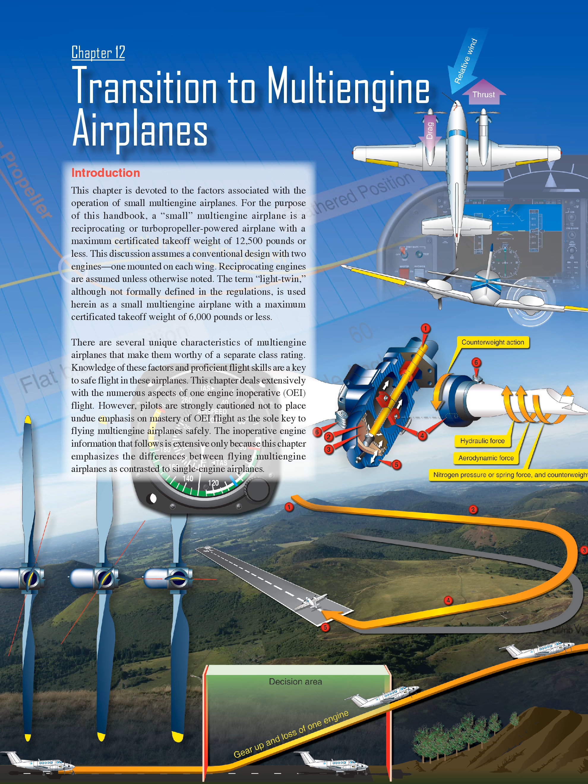This chapter deals extensively with the numerous aspects of one-engine inoperative, OEI, flight. However, pilots are strongly cautioned not to place undue emphasis on mastery of OEI flight as the sole key to flying multi-engine airplanes safely. The inoperative engine information that follows is extensive only because this chapter emphasizes the differences between flying multi-engine airplanes as contrasted to single-engine airplanes. The modern, well-equipped multi-engine airplane can be remarkably capable under many circumstances. But, as with single-engine airplanes, it must be flown prudently by a current and competent pilot to achieve the highest possible level of safety.

This chapter contains information and guidance on the performance of certain maneuvers and procedures in small multi-engine airplanes for the purposes of flight training and pilot certification testing. The airplane manufacturer is the final authority on the operation of a particular make and model airplane. Flight instructors and students should use the Federal Aviation Administration's Approved Flight Manual, AFM, and/or the Pilot's Operating Handbook, POH, but realize that the airplane manufacturer's guidance and procedures take precedence.

The basic difference between operating a multi-engine airplane and a single-engine airplane is the potential problem involving an engine failure. The penalties for loss of an engine are twofold: performance and control. The most obvious problem is the loss of 50% of power, which reduces climb performance 80 to 90%, sometimes even more. The other is the control problem caused by the remaining thrust, which is now asymmetrical. Attention to both these factors is crucial to safe OEI flight. The performance and systems redundancy of a multi-engine airplane is a safety advantage only to a trained and proficient pilot.

Terms and definitions: pilots of single-engine airplanes are already familiar with many performance V-speeds and their definitions. Twin-engine airplanes have several additional V-speeds unique to OEI operation. These speeds are differentiated by the notation SE for single-engine. A review of some key V-speeds and several new V-speeds unique to twin-engine airplanes are listed below. VR, rotation speed, speed at which back pressure is applied to rotate the airplane to a takeoff attitude. VLOF, liftoff speed, speed at which the airplane leaves the surface. Note, some manufacturers reference takeoff performance data to VR, others to VLOF.

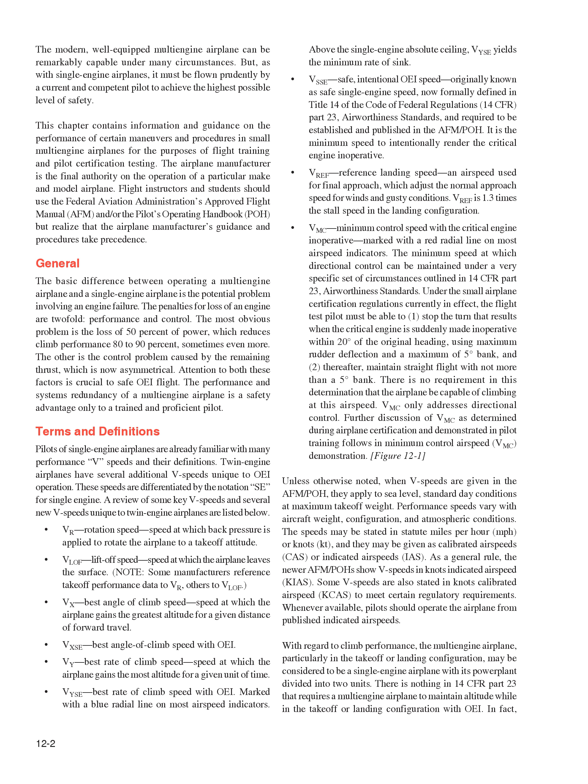With regard to climb performance, the multi-engine airplane, particularly in the takeoff or landing configuration, may be considered to be a single-engine airplane with its power plant divided into two units. There is nothing in 14 CFR Part 23 that requires a multi-engine airplane to maintain altitude while in the takeoff or landing configuration with one engine inoperative, OEI. In fact, many twins are not required to do this in any configuration, even at sea level.

The current 14 CFR Part 23 single-engine climb performance requirements for reciprocating engine-powered multi-engine airplanes are as follows. For more than 6,000 pounds maximum weight and/or VSO more than 61 knots, the single-engine rate of climb in feet per minute, FPM, at 5,000 feet mean sea level, MSL, must be equal to at least 0.027 VSO². For airplanes type certificated February 4, 1991, or thereafter, the climb requirement is expressed in terms of a climb gradient, 1.5%. The climb gradient is not a direct equivalent of the 0.027 VSO² formula. Do not confuse the date of type certification with the airplane's model year. The type certification basis of many multi-engine airplanes dates back to the Civil Aviation Regulations, CAR 3.

For 6,000 pounds or less maximum weight and VSO 61 knots or less, the single-engine rate of climb at 5,000 feet MSL must simply be determined. The rate of climb could be a negative number. There is no requirement for a single-engine positive rate of climb at 5,000 feet or any other altitude. For light twins type certificated February 4, 1991, or thereafter, the single-engine climb gradient, positive or negative, is simply determined. Rate of climb is the altitude gain per unit of time, while climb gradient is the actual measure of altitude gained per 100 feet of horizontal travel, expressed as a percentage. An altitude gain of 1.5 feet per 100 feet of travel, or 15 feet per 1,000, or 150 feet per 10,000, is a climb gradient of 1.5%.

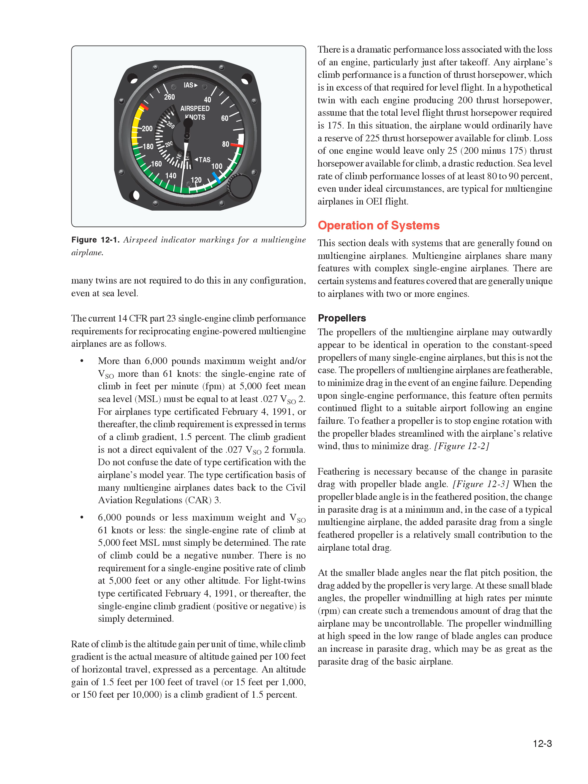As a review, the constant speed propellers on almost all single-engine airplanes are of the non-feathering, oil pressure to increase pitch design. In this design, increased oil pressure from the propeller governor drives the blade angle towards high pitch, low RPM. In contrast, the constant speed propellers installed on most multi-engine airplanes are full feathering, counterweighted, oil pressure to decrease pitch designs. In this design, increased oil pressure from the propeller governor drives the blade angle towards low pitch, high RPM, away from the feather blade angle.

In effect, the only thing that keeps these propellers from feathering is a constant supply of high-pressure engine oil. This is a necessity to enable propeller feathering in the event of a loss of oil pressure or a propeller governor failure. The aerodynamic forces alone acting upon a windmilling propeller tend to drive the blades to low pitch, high RPM. Counterweights attached to the shank of each blade tend to drive the blades to high pitch, low RPM.

Inertia, or apparent force, called centrifugal force, acting through the counterweights, is generally slightly greater than the aerodynamic forces. Oil pressure from the propeller governor is used to counteract the counterweights and drives the blade angles to low pitch, high RPM. A reduction in oil pressure causes the RPM to be reduced from the influence of the counterweights. Figure 12.4. To feather the propeller control is brought fully aft.

All oil pressure is dumped from the governor, and the counterweights drive the propeller blades towards feather. As centrifugal force acting on the counterweights decays from decreasing RPM, additional forces are needed to completely feather the blades. This additional force comes from either a spring or high-pressure air stored in the propeller dome, which forces the blades into the feathered position. The entire process may take up to 10 seconds. Feathering a propeller only alters blade angle and stops engine rotation.

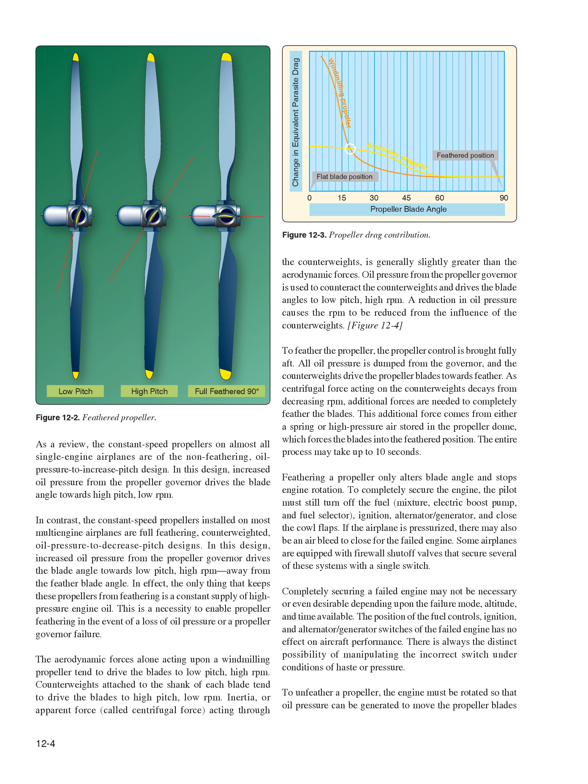To unfeather a propeller, the engine must be rotated so that oil pressure can be generated to move the propeller blades. From the feathered position, the ignition is turned on prior to engine rotation with the throttle at low idle and the mixture rich. With the propeller control in a high RPM position, the starter is engaged. The engine begins to windmill, start, and run as oil pressure moves the blades out of feather.

As the engine starts, the propeller RPM should be immediately reduced until the engine has had several minutes to warm up. The pilot should monitor cylinder head and oil temperatures. In any event, the AFM/POH procedures should be followed for the exact unfeathering procedure. Both feathering and starting a feathered reciprocating engine on the ground are strongly discouraged by manufacturers due to the excessive stress and vibrations generated.

As just described, a loss of oil pressure from the propeller governor allows the counterweights, spring, and/or dome charge to drive the blades to feather. Logically then, the propeller blades should feather every time an engine is shut down as oil pressure falls to zero. Yet, this does not occur.

Preventing this is a small pin in the pitch-changing mechanism of the propeller hub that does not allow the propeller blades to feather once RPM drops below approximately 800. The pin senses a lack of centrifugal force from propeller rotation and falls into place, preventing the blades from feathering. Therefore, if a propeller is to be feathered, it must be done before engine RPM decays below approximately 800.

On one popular model of turboprop engine, the propeller blades do, in fact, feather with each shutdown. This propeller is not equipped with such centrifugally operated pins due to a unique engine design. An unfeathering accumulator is a device that permits starting a feathered engine in flight without the use of the electric starter. An accumulator is any device that stores a reserve of high pressure.

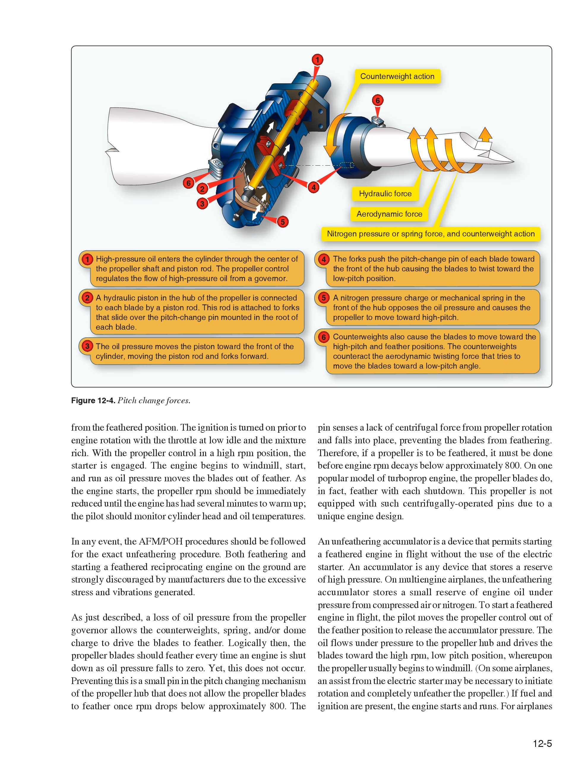On some airplanes, an assist from the electric starter may be necessary to initiate rotation and completely unfeather the propeller. If fuel and ignition are present, the engine starts and runs. For airplanes used in training, this saves much electric starter and battery wear. High oil pressure from the propeller governor recharges the accumulator just moments after engine rotation begins.

Propeller synchronization. Many multi-engine airplanes have a propeller synchronizer, prop sync, installed to eliminate the annoying drumming or beat of propellers whose RPM are close, but not precisely the same. To use prop sync, the propeller RPM is coarsely matched by the pilot and the system is engaged. The prop sync adjusts the RPM of the slave engine to precisely match the RPM of the master engine and then maintains that relationship. The prop sync should be disengaged when the pilot selects a new propeller RPM and then re-engaged after the new RPM is set.

The prop sync should always be off for takeoff, landing, and single engine operation. The AFM/POH should be consulted for system description and limitations. A variation on the propeller synchronizer is the propeller synchrophaser. A synchrophaser acts much like a synchronizer to precisely match RPM, but it goes one step further. It not only matches RPM but actually compares and adjusts the positions of the individual blades of the propellers in their arcs. There can be significant propeller noise and vibration reductions with a propeller synchrophaser.

From the pilot's perspective, operation of a propeller synchronizer and a propeller synchrophaser are very similar. A synchrophaser is also commonly referred to as prop sync, although that is not entirely correct nomenclature from a technical standpoint. As a pilot aid to manually synchronizing the propellers, some twins have a small gauge mounted in or by the tachometers with a propeller symbol on a disc that spins. The pilot manually fine-tunes the engine RPM so as to stop disc rotation, thereby synchronizing the propellers. This is a useful backup to synchronizing engine RPM using the audible propeller beat. This gauge is also found installed with most propeller synchronizer and synchrophaser systems. Some synchrophaser systems use a knob for the pilot to control the phase angle.

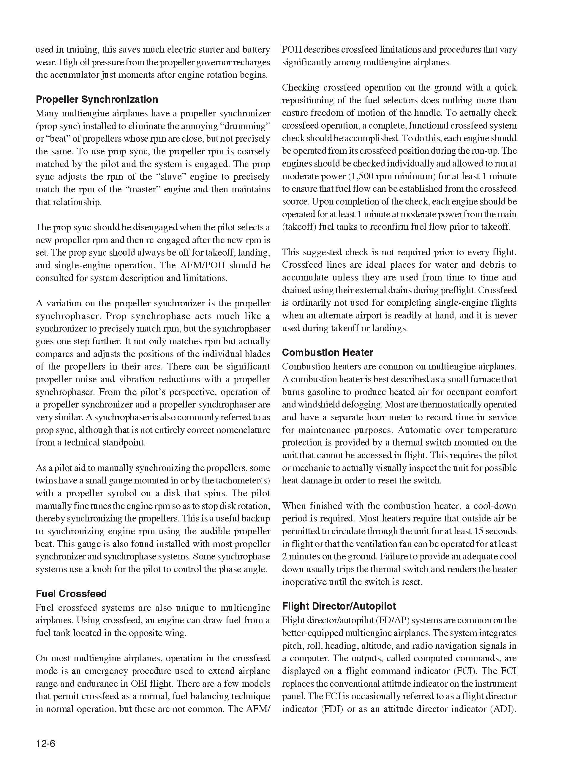Flight Director/Autopilot. FD/AP systems are common on the better equipped multi-engine airplanes. The system integrates pitch, roll, heading, altitude, and radio navigation signals in a computer. The outputs, called computed commands, are displayed on a Flight Command Indicator (FCI). The FCI replaces the conventional attitude indicator on the instrument panel. The FCI is occasionally referred to as a Flight Director Indicator (FDI) or as an Attitude Director Indicator (ADI).

The entire Flight Director/Autopilot system is sometimes called an Integrated Flight Control System (IFCS) by some manufacturers. Others may use the term Automatic Flight Control System (AFCS). The FD/AP system may be employed at the following different levels: off, raw data, flight director, computed commands, autopilot.

With the system off, the FCI operates as an ordinary attitude indicator. On most FCIs, the command bars are biased out of view when the FD is off. The pilot maneuvers the airplane as though the system were not installed. To maneuver the airplane using the FD, the pilot enters the desired modes of operation: heading, altitude, navigation, NAV intercept, and tracking, on the FD/AP mode controller.

The computed flight commands are then displayed to the pilot through either a single-cue or dual-cue system in the FCI. On a single-cue system, the commands are indicated by V bars. On a dual-cue system, the commands are displayed on two separate command bars, one for pitch and one for roll. To maneuver the airplane using computed commands, the pilot flies the symbolic airplane of the FCI to match the steering cues presented. On most systems, to engage the autopilot, the FD must first be operating.

At any time thereafter, the pilot may engage the autopilot through the mode controller. The autopilot then maneuvers the airplane to satisfy the computed commands of the FD. Like any computer, the FD/AP system only does what it is told. The pilot must ensure that it has been programmed properly for the particular phase of flight desired. The armed and/or engaged modes are usually displayed on the mode controller or separate annunciator lights.

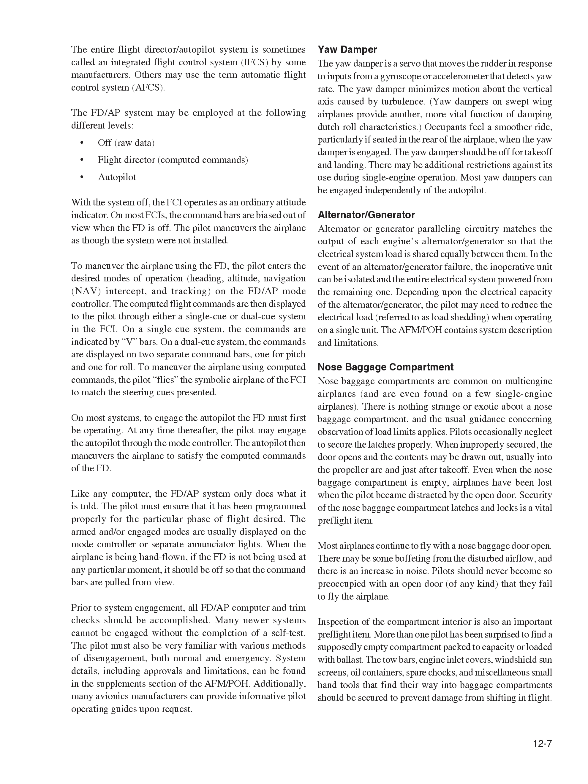Anti-icing/deicing equipment is frequently installed on multi-engine airplanes and consists of a combination of different systems. These may be classified as either anti-icing or deicing, depending upon function. The presence of anti-icing and deicing equipment, even though it may appear elaborate and complete, does not necessarily mean that the airplane is approved for flight in icing conditions. The AFM/POH, placards, and even the manufacturer should be consulted for specific determination of approvals and limitations.

Anti-icing equipment is provided to prevent ice from forming on certain protected surfaces. Anti-icing equipment includes heated pitot tubes, heated or non-icing static ports and fuel vents, propeller blades with electrothermal boots or alcohol slingers, windshields with alcohol spray or electrical resistance heating, windshield defoggers, and heated stall warning lift detectors. On many turboprop engines, the lip surrounding the air intake is heated either electrically or with bleed air. In the absence of AFM/POH guidance to the contrary, anti-icing equipment should be actuated prior to flight into known or suspected icing conditions.

Deicing equipment is generally limited to pneumatic boots on wing and tail leading edges. Deicing equipment is installed to remove ice that is already formed on protected surfaces. Upon pilot actuation, the boots inflate with air from the pneumatic pumps to break off accumulated ice. After a few seconds of inflation, they are deflated back to their normal position with the assistance of a vacuum. The pilot monitors the buildup of ice and cycles the boots as directed in the AFM/POH. An ice light on the left engine nacelle allows the pilot to monitor wing ice accumulation at night.

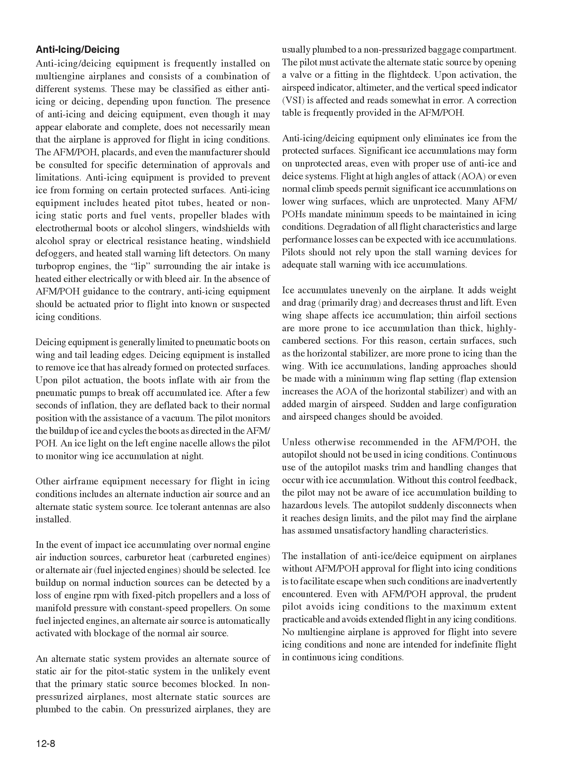Even with AFM/POH approval, the prudent pilot avoids icing conditions to the maximum extent practicable and avoids extended flight in any icing conditions. No multi-engine airplane is approved for flight into severe icing conditions, and none are intended for indefinite flight in continuous icing conditions.

Performance and limitations. Discussion of performance and limitations requires the definition of the following terms. Accelerate-stop distance is the runway length required to accelerate to a specified speed, either VR or VLOF, as specified by the manufacturer, experience an engine failure, and bring the airplane to a complete stop. Accelerate-go distance is the horizontal distance required to continue the takeoff and climb to 50 feet, assuming an engine failure at VR or VLOF, as specified by the manufacturer.

Climb gradient is a slope most frequently expressed in terms of altitude gain per 100 feet of horizontal distance, whereupon it is stated as a percentage. A 1.5% climb gradient is an altitude gain of 1.5 feet per 100 feet of horizontal travel. Climb gradient may also be expressed as a function of altitude gain per nautical mile (NM), or as a ratio of the horizontal distance to the vertical distance, 50:1, for example. Unlike rate of climb, climb gradient is affected by wind. Climb gradient is improved with a headwind component and reduced with a tailwind component.

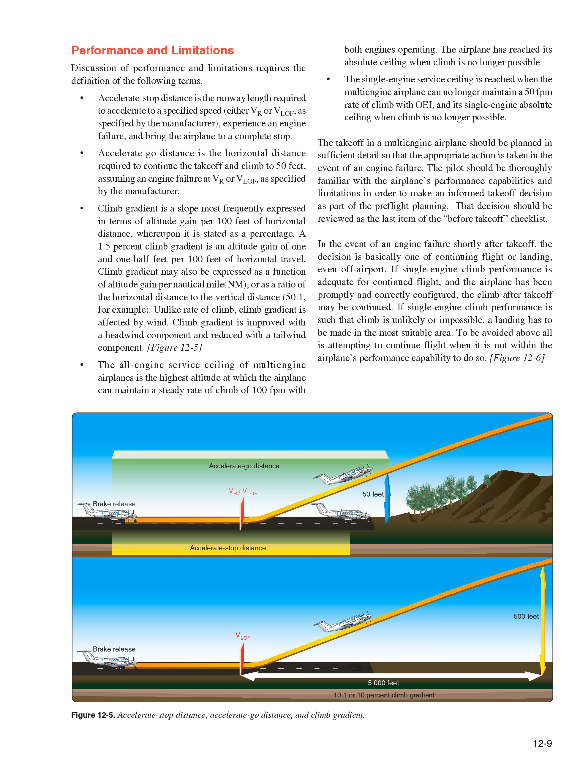Figure 12.6. Takeoff planning factors include weight and balance, airplane performance, both single and multi-engine, runway length, slope and contamination, terrain and obstacles in the area, weather conditions, and pilot proficiency. Most multi-engine airplanes have AFM/POH performance charts, and the pilot should be highly proficient in their use. Prior to takeoff, the multi-engine pilot should ensure that the weight and balance limitations have been observed, the runway length is adequate, and the normal flight path clears obstacles and terrain. A clear and definite course of action to follow in the event of engine failure is essential.

The regulations do not specifically require that the runway length be equal to or greater than the accelerate-stop distance. Most AFM/POHs publish accelerate-stop distances only as an advisory. It becomes a limitation only when published in the limitations section of the AFM/POH. Experienced multi-engine pilots, however, recognize the safety margin of runway lengths in excess of the bare minimum required for normal takeoff. They insist on runway lengths of at least accelerate-stop distance as a matter of safety and good operating practice.

The multi-engine pilot must keep in mind that the accelerate-go distance, as long as it is, has only brought the airplane, under ideal circumstances, to a point a mere 50 feet above the takeoff elevation. To achieve even this meager climb, the pilot had to instantaneously recognize and react to an unanticipated engine failure, retract the landing gear, identify and feather the correct engine, all the while maintaining precise airspeed control and bank angle as the airspeed is nursed.

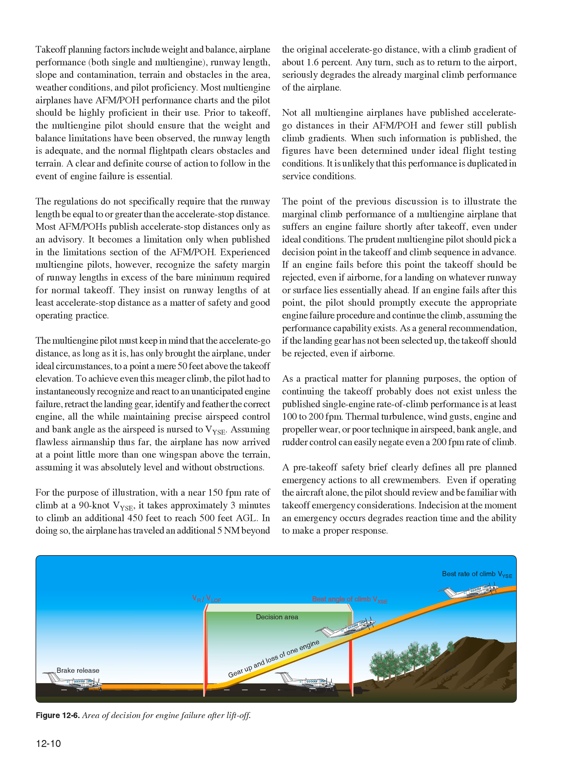Weight and balance. The weight and balance concept is no different than that of a single-engine airplane. The actual execution, however, is almost invariably more complex due to a number of new loading areas, including nose and aft baggage compartments, nacelle lockers, main fuel tanks, auxiliary fuel tanks, nacelle fuel tanks, and numerous seating options in a variety of interior configurations. The flexibility in loading offered by the multi-engine airplane places a responsibility on the pilot to address weight and balance prior to each flight.

The terms empty weight, licensed empty weight, standard empty weight, and basic empty weight as they appear on the manufacturer's original weight and balance documents are sometimes confused by pilots. In 1975, the General Aviation Manufacturers Association (GAMA) adopted a standardized format for AFM/POHs. It was implemented by most manufacturers in model year 1976. Airplanes whose manufacturers conform to the GAMA standards utilize the following terminology for weight and balance: standard empty weight plus optional equipment equals basic empty weight.

Standard empty weight is the weight of the standard airplane, full hydraulic fluid, unusable fuel, and full oil. Optional equipment includes the weight of all equipment installed beyond standard. Basic empty weight is the standard empty weight plus optional equipment. Note that basic empty weight includes no usable fuel, but full oil.

Airplanes manufactured prior to the GAMA format generally utilize the following terminology for weight and balance, although the exact terms may vary somewhat. Empty weight plus unusable fuel equals standard empty weight. Standard empty weight plus optional equipment equals licensed empty weight. Empty weight is the weight of the standard airplane, full hydraulic fluid, and undrainable oil. Unusable fuel is the fuel remaining in the airplane not available to the engines. Standard empty weight is the empty weight plus unusable fuel.

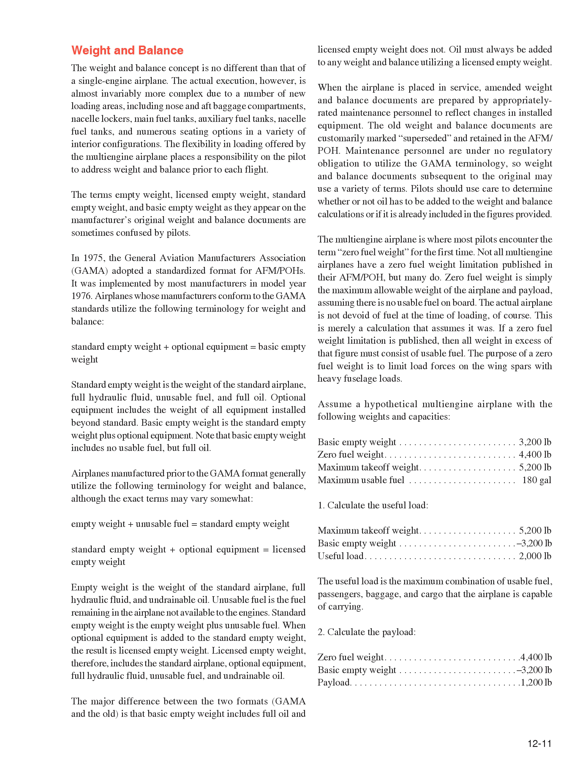1. Calculate the useful load. The useful load is the maximum combination of usable fuel, passengers, baggage, and cargo that the airplane is capable of carrying. 2. Calculate the payload. The payload is the maximum combination of passengers, baggage, and cargo that the airplane is capable of carrying. A zero fuel weight, if published, is the limiting weight. 3. Calculate the fuel capacity at maximum payload, 1,200 pounds, maximum takeoff weight.

5,200 pounds zero fuel weight.

Minus 4,400 pounds fuel allowed.

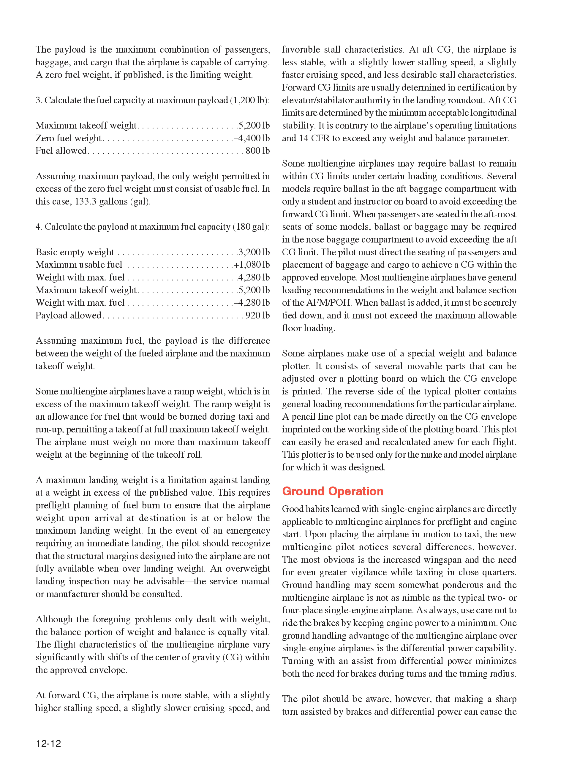The pilot should be aware, however, that making a sharp turn assisted by brakes and differential power can cause the airplane to pivot about a stationary inboard wheel and landing gear. This is abuse for which the airplane was not designed and should be guarded against. Unless otherwise directed by the AFM/POH, all ground operations should be conducted with the cowl flaps fully open. The use of strobe lights is normally deferred until taxiing onto the active runway.

Normal and crosswind takeoff and climb begin with the before takeoff checklist, which includes a pre-takeoff safety brief complete and air traffic control, ATC, clearance received. The airplane should be taxied into position on the runway center line. If departing from an airport without an operating control tower, a careful check for approaching aircraft should be made along with a radio advisory on the appropriate frequency.

Sharp turns onto the runway combined with a rolling takeoff are not a good operating practice and may be prohibited by the AFM/POH due to the possibility of unporting a fuel tank pickup. The takeoff itself may be prohibited by the AFM/POH under any circumstances below certain fuel levels. The flight controls should be positioned for a crosswind, if present.

Exterior lights, such as landing and taxi lights, and wingtip strobes should be illuminated immediately prior to initiating the takeoff roll, day or night. If holding in takeoff position for any length of time, particularly at night, the pilot should activate all exterior lights upon taxiing into position. Takeoff power should be set as recommended in the AFM/POH.

With normally aspirated, non-turbocharged engines, this is full throttle. Full throttle is also used in most turbocharged engines. There are some turbocharged engines, however, that require the pilot to set a specific power setting, usually just below red line manifold pressure. This yields takeoff power with less than full throttle travel. Turbocharged engines often require special consideration.

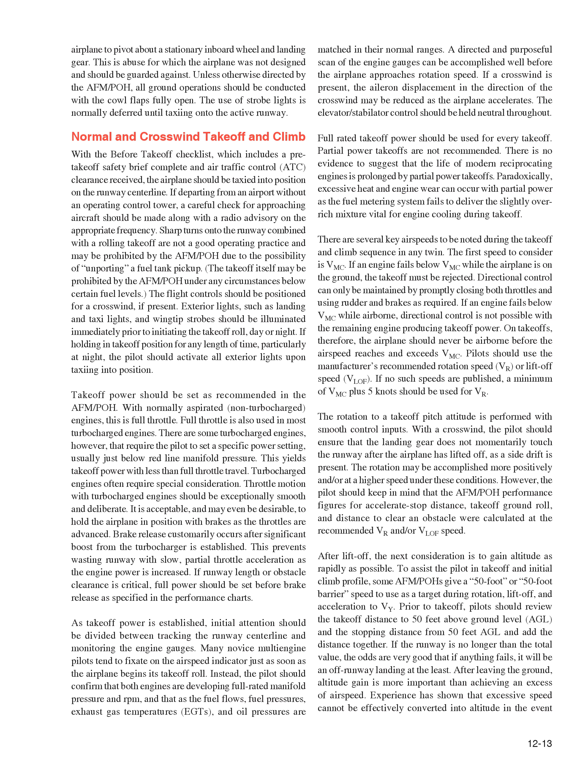After leaving the ground, altitude gain is more important than achieving an excessive airspeed. Experience has shown that excessive speed cannot be effectively converted into altitude in the event of an engine failure. Additional altitude increases the time available to recognize and respond to any aircraft abnormality or emergency during the climb segment. Excessive climb attitudes can be just as dangerous as excessive airspeed. Steep climb attitudes limit forward visibility and impede the pilot's ability to detect and avoid other traffic.

The airplane should be allowed to accelerate in a shallow climb to attain VY, the best all-engine rate of climb speed. VY should then be maintained until a safe single-engine maneuvering altitude, considering terrain and obstructions, is achieved. Any speed above or below VY reduces the performance of the airplane. Even with all engines operating normally, terrain and obstruction clearance during the initial climb after takeoff is an important preflight consideration. Most airliners and most turbine-powered airplanes climb out at an attitude that yields best rate of climb (VY), usually utilizing a flight management system (FMS).

When to raise the landing gear after takeoff depends on several factors. Normally, the gear should be retracted when there is insufficient runway available for landing and after a positive rate of climb is established as indicated on the altimeter. If an excessive amount of runway is available, it would not be prudent to leave the landing gear down for an extended period of time and sacrifice climb performance and acceleration. Leaving the gear extended after the point at which a landing cannot be accomplished on the runway is a hazard.

In some multi-engine airplanes, operating in a high-density altitude environment, a positive rate of climb with the landing gear down is not possible. Waiting for a positive rate of climb under these conditions is not practicable. An important point to remember is that raising the landing gear as early as possible after liftoff drastically decreases the drag profile and significantly increases climb performance should an engine failure occur.

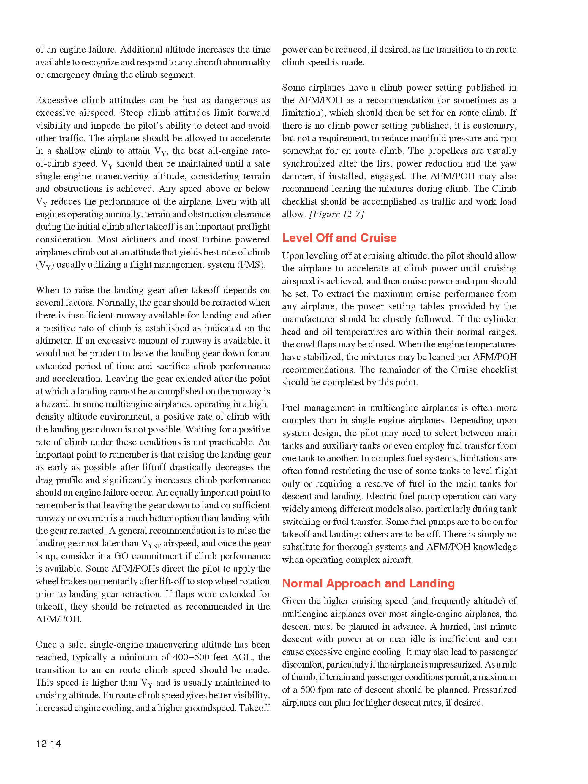Normal approach and landing. Given the higher cruising speed, and frequently altitude, of multi-engine airplanes over most single-engine airplanes, the descent must be planned in advance. A hurried, last-minute descent with power at or near idle is inefficient and can cause excessive engine cooling. It may also lead to passenger discomfort, particularly if the airplane is unpressurized. As a rule of thumb, if terrain and passenger conditions permit, a maximum of a 500 fpm rate of descent should be planned. Pressurized airplanes can plan for higher descent rates, if desired.

In a descent, some airplanes require a minimum EGT or may have a minimum power setting or cylinder head temperature to observe. In any case, combinations of very low manifold pressure and high RPM settings are strongly discouraged by engine manufacturers. If higher descent rates are necessary, the pilot should consider extending partial flaps or lowering the landing gear before retarding the power excessively. The descent checklist should be initiated upon leaving cruising altitude and completed before arrival in the terminal area.

Upon arrival in the terminal area, pilots are encouraged to turn on their landing and recognition lights when operating below 10,000 feet day or night, and especially when operating within 10 miles of any airport or in conditions of reduced visibility. The traffic pattern and approach are typically flown at somewhat higher indicated airspeeds in a multi-engine airplane contrasted to most single-engine airplanes. The pilot may allow for this through an early start on the before landing checklist.

This provides time for proper planning, spacing, and thinking well ahead of the airplane. Many multi-engine airplanes have partial flap extension speeds above VFE, and partial flaps can be deployed prior to traffic pattern entry. Normally, the landing gear should be selected and confirmed down when abeam the intended point of landing as the downwind leg is flown. Figure 12.8, the FAA recommends a stabilized approach concept.

To the greatest extent practical, on final approach and within 500 feet AGL, the airplane should be on speed, in trim, configured for landing, tracking the extended centerline of the runway, and established in a constant angle of descent towards an aim point in the touchdown zone. Absent unusual flight conditions, only minor corrections are required to maintain this approach to the roundout and touchdown.

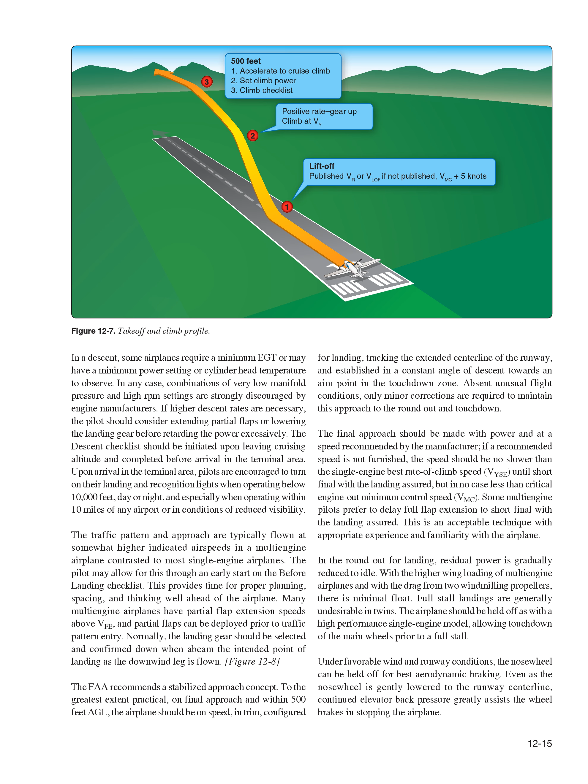If runway length is critical, or with a strong crosswind, or if the surface is contaminated with water, ice or snow, it is undesirable to rely solely on aerodynamic braking after touchdown. The full weight of the airplane should be placed on the wheels as soon as practicable. The wheel brakes are more effective than aerodynamic braking alone in decelerating the airplane. Once on the ground, elevator back pressure should be used to place additional weight on the main wheels and to add additional drag. When necessary, wing flap retraction also adds additional weight to the wheels and improves braking effectiveness. Flap retraction during the landing rollout is discouraged, however, unless there is a clear, operational need. It should not be accomplished as routine with each landing.

Some multi-engine airplanes, particularly those of the cabin class variety, can be flown through the roundout and touchdown with a small amount of power. This is an acceptable technique to prevent high sink rates and to cushion the touchdown. The pilot should keep in mind, however, that the primary purpose in landing is to get the airplane down and stopped. This technique should only be attempted when there is a generous margin of runway length. As propeller blast flows directly over the wings, lift as well as thrust is produced.

The pilot should taxi clear of the runway as soon as speed and safety permit, and then accomplish the after-landing checklist. Ordinarily, no attempt should be made to retract the wing flaps or perform other checklist duties until the airplane has been brought to a halt when clear of the active runway. Exceptions to this would be the rare operational needs discussed above, to relieve the weight from the wings and place it on the wheels. In these cases, AFM/POH guidance should be followed. The pilot should not indiscriminately reach out for any switch or control on landing rollout. An inadvertent landing gear retraction while meaning to retract the wing flaps may result.

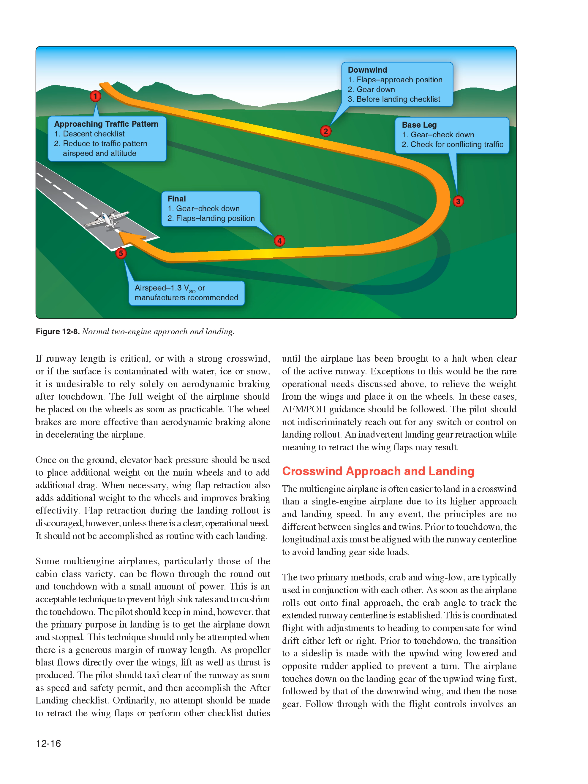The airplane touches down on the landing gear of the upwind wing first, followed by that of the downwind wing, and then the nose gear. Follow-through with the flight controls involves an increasing application of aileron into the wind until full control deflection is reached. The point at which the transition from the crab to the side slip is made is dependent upon pilot familiarity with the airplane and experience.

With high skill and experience levels, the transition can be made during the roundout just before touchdown. With lesser skill and experience levels, the transition is made at increasing distances from the runway. Some multi-engine airplanes, as some single-engine airplanes, have AFM/POH limitations against slips in excess of a certain time period, 30 seconds, for example. This is to prevent engine power loss from fuel starvation as the fuel in the tank of the lowered wing flows towards the wingtip, away from the fuel pickup point. This time limit must be observed if the wing low method is utilized.

Some multi-engine pilots prefer to use differential power to assist in crosswind landings. The asymmetrical thrust produces a yawing moment little different from that produced by the rudder. When the upwind wing is lowered, power on the upwind engine is increased to prevent the airplane from turning. This alternate technique is completely acceptable, but most pilots feel they can react to changing wind conditions quicker with rudder and aileron than throttle movement. This is especially true with turbocharged engines where the throttle response may lag momentarily. The differential power technique should be practiced with an instructor before being attempted alone.

Short field takeoff and climb. The short field takeoff and climb differs from the normal takeoff and climb in the airspeeds and initial climb profile. Some AFM/POHs give separate short field takeoff procedures and performance charts that recommend specific flap settings and airspeeds. Other AFM/POHs do not provide separate short field procedures. In the absence of such specific procedures, the airplane should be operated only as recommended in the AFM/POH. No operations should be conducted contrary to the recommendations in the AFM/POH.

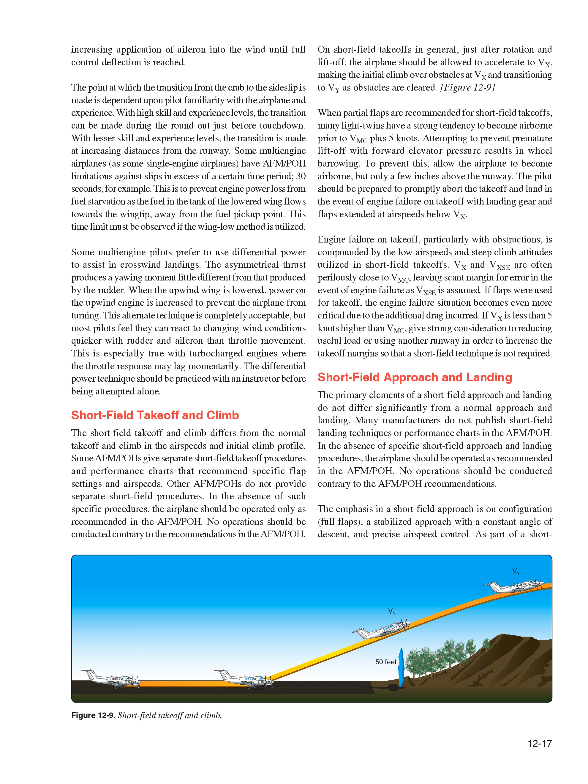The emphasis in a short field approach is on configuration, full flaps, a stabilized approach with a constant angle of descent, and precise airspeed control. As part of a short field approach and landing procedure, some AFM/POHs recommend a slightly slower than normal approach airspeed. If no such slower speed is published, use the AFM/POH recommended normal approach speed. Full flaps are used to provide the steepest approach angle. If obstacles are present, the approach should be planned so that no drastic power reductions are required after they are cleared. The power should be smoothly reduced to idle in the roundout prior to touchdown. Pilots should keep in mind that the propeller blast blows over the wings, providing some lift in addition to thrust.

Reducing power significantly just after obstacle clearance usually results in a sudden, high sink rate that may lead to a hard landing. After the short field touchdown, maximum stopping effort is achieved by retracting the wing flaps, adding back pressure to the elevator/stabilator, and applying heavy braking. However, if the runway length permits, the wing flaps should be left in the extended position until the airplane has been stopped clear of the runway.

There is always a significant risk of retracting the landing gear instead of the wing flaps when flap retraction is attempted on the landing rollout. Landing conditions that involve a short field, high winds, or strong crosswinds are just about the only situations where flap retraction on the landing rollout should be considered. When there's an operational need to retract the flaps just after touchdown, it must be done deliberately with the flap handle positively identified before it is moved.

Go around. When the decision to go around is made, the throttle should be advanced to takeoff power. With adequate airspeed, the airplane should be placed in a climb pitch attitude. These actions, which are accomplished simultaneously, arrest the sink rate and place the airplane in the proper attitude for transition to a climb. The initial target airspeed is Vy, or Vx if obstructions are present. With sufficient airspeed, the flaps should be retracted from full to an intermediate position and the landing gear retracted when there is a positive rate of climb and no chance of runway contact. The remaining flaps should then be retracted.

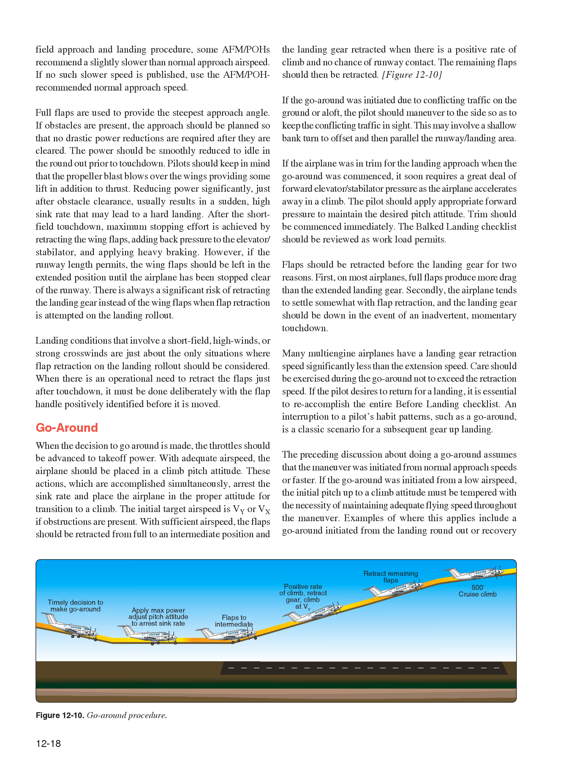The preceding discussion about doing a go-around assumes that the maneuver was initiated from normal approach speeds or faster. If the go-around was initiated from a low airspeed, the initial pitch up to a climb attitude must be tempered with the necessity of maintaining adequate flying speed throughout the maneuver. Examples of where this applies include a go-around initiated from the landing roundout or recovery from a bad bounce, as well as a go-around initiated due to an inadvertent approach to a stall. The first priority is always to maintain control and obtain adequate flying speed. A few moments of level or near-level flight may be required as the airplane accelerates up to climb speed.

Rejected takeoff. A takeoff can be rejected for the same reasons a takeoff in a single-engine airplane would be rejected. Once the decision to reject a takeoff is made, the pilot should promptly close both throttles and maintain directional control with the rudder, nosewheel steering, and brakes. Aggressive use of rudder, nosewheel steering, and brakes may be required to keep the airplane on the runway, particularly if an engine failure is not immediately recognized and accompanied by prompt closure of both throttles. However, the primary objective is not necessarily to stop the airplane in the shortest distance, but to maintain control of the airplane as it decelerates. In some situations, it may be preferable to continue into the overrun area under control, rather than risk directional control loss, landing gear collapse, or tire/brake failure in an attempt to stop the airplane in the shortest possible distance.

Engine failure after liftoff. A takeoff or go-around is the most critical time to suffer an engine failure. The airplane will be slow, close to the ground, and may even have landing gear and flaps extended. Altitude and time are minimal. Until feathered, the propeller of the failed engine is windmilling, producing a great deal of drag and yawing tendency. Airplane climb performance is marginal or even non-existent, and obstructions may lie ahead. An emergency contingency plan and safety brief should be clearly understood well before the takeoff roll commences. An engine failure before a predetermined airspeed or point results in an aborted takeoff. An engine failure after a certain airspeed and point, with the gear up and climb performance assured, results in a continued takeoff. With loss of an engine, it is paramount to maintain airplane control and comply with the manufacturer's recommended emergency procedures.

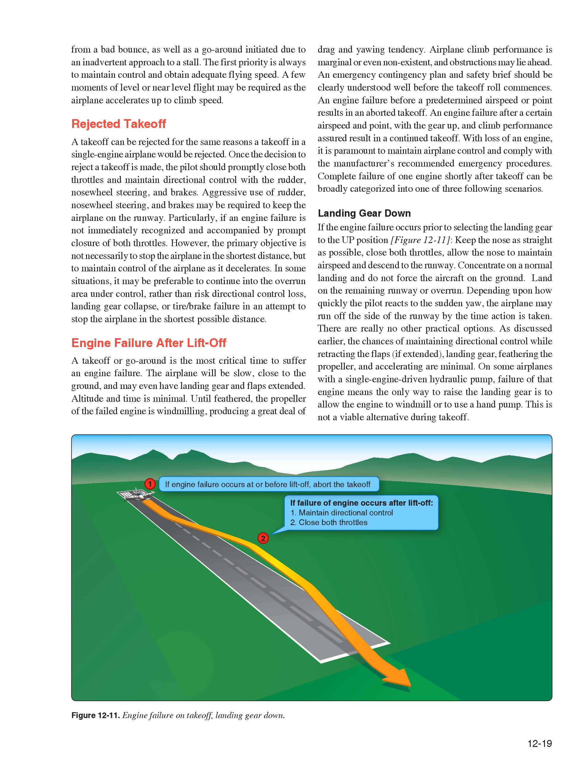Landing gear control selected up, single engine climb performance inadequate. When operating near or above the single engine ceiling and engine failure is experienced shortly after liftoff, a landing must be accomplished on whatever essentially lies ahead. Figure 12-12, there is also the option of continuing ahead, in a descent, with the remaining engine producing power, as long as the pilot is not tempted to remain airborne beyond the airplane's performance capability. Remaining airborne and bleeding off airspeed in a futile attempt to maintain altitude is almost invariably fatal. Landing under control is paramount.

The greatest hazard in a single-engine takeoff is attempting to fly when it is not within the performance capability of the airplane to do so. An accident is inevitable. Analysis of engine failures on takeoff reveals a very high success rate of off-airport, engine inoperative landings when the airplane is landed under control. Analysis also reveals a very high fatality rate in stall-spin accidents when the pilot attempts flight beyond the performance capability of the airplane. As mentioned previously, if the airplane's landing gear retraction mechanism is dependent upon hydraulic pressure from a certain engine-driven pump, failure of that engine can mean a loss of hundreds of feet of altitude as the pilot either windmills the engine to provide hydraulic pressure to raise the gear or raises it manually with a backup pump. Landing gear control selected up, single engine climb performance adequate.

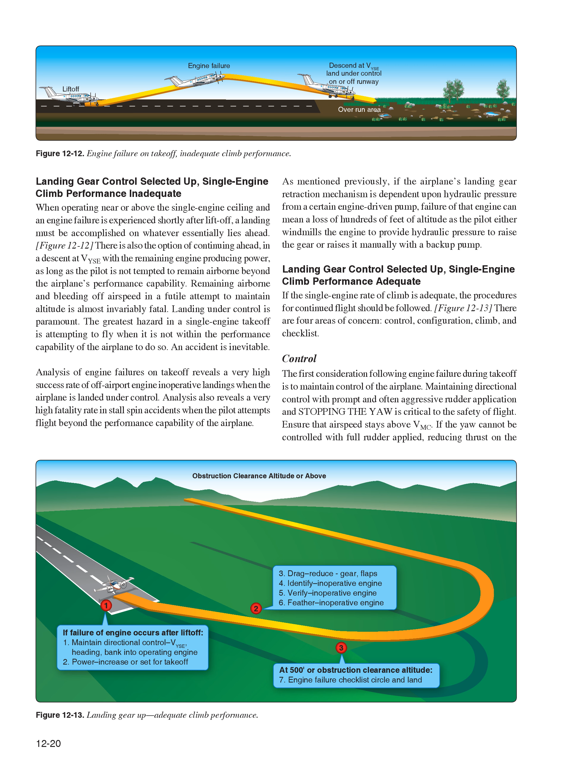If the single engine rate of climb is adequate, the procedures for continued flight should be followed. Figure 12-13, there are four areas of concern: control, configuration, climb, and checklist. Control. The first consideration following engine failure during takeoff is to maintain control of the airplane. Maintaining directional control with prompt and often aggressive rudder application and stopping the yaw is critical to the safety of flight. Ensure that airspeed stays above VMC. If the yaw cannot be controlled with full rudder applied, reducing thrust on the operative engine is the only alternative.

Attempting to correct the roll with aileron without first applying rudder increases drag and adverse yaw and further degrades directional control. After rudder is applied to stop the yaw, a slight amount of aileron should be used to bank the airplane toward the operative engine. This is the most efficient way to control the aircraft, minimize drag, and gain the most performance. Control forces, particularly on the rudder, may be high. The pitch attitude for VYSE has to be lowered from that of VY.

At least 5 degrees of bank should be used initially to stop the yaw and maintain directional control. This initial bank input is held only momentarily, just long enough to establish or ensure directional control. Climb performance suffers when bank angles exceed approximately 2 or 3 degrees, but obtaining and maintaining VYSE and directional control are paramount. Trim should be adjusted to lower the control forces. Configuration. The memory items from the engine failure after takeoff checklist should be promptly executed to configure the airplane for climb. Figure 12-14, the specific procedures to follow are found in the AFM/POH and checklist for the particular airplane. Most direct the pilot to assume VYSE, set takeoff power, retract the flaps and landing gear, identify, verify, and feather the failed engine.

On some airplanes, the landing gear is to be retracted before the flaps. The identify step is for the pilot to initially identify the failed engine. Confirmation on the engine gauges may or may not be possible, depending upon the failure mode. Identification should be primarily through the control inputs required to maintain straight flight, not the engine gauges.

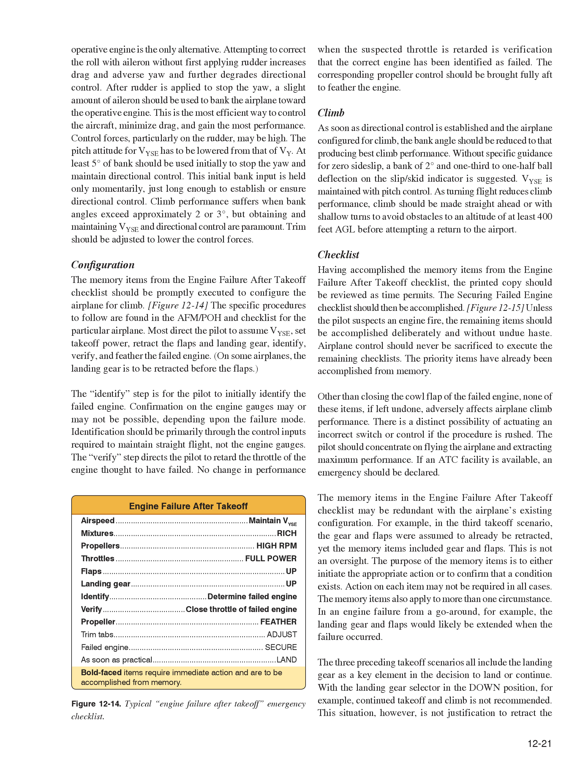In an engine failure from a go-around, for example, the landing gear and flaps would likely be extended when the failure occurred. The three preceding takeoff scenarios all include the landing gear as a key element in the decision to land or continue. With the landing gear selector in the down position, for example, continued takeoff and climb is not recommended. This situation, however, is not justification to retract the landing gear the moment the airplane lifts off the surface on takeoff as a normal procedure. The landing gear should remain selected down as long as there is usable runway or overrun available to land on.

The use of wing flaps for takeoff virtually eliminates the likelihood of a single engine climb until the flaps are retracted. There are two time-tested memory aids the pilot may find useful in dealing with engine out scenarios. The first, dead foot, dead engine, is used to assist in identifying the failed engine. Depending on the failure mode, the pilot will not be able to consistently identify the failed engine in a timely manner from the engine gauges.

In maintaining directional control, however, rudder pressure is exerted on the side, left or right, of the airplane with the operating engine. Thus, the dead foot is on the same side as the dead engine. Variations on this saying include idle foot, idle engine, and working foot, working engine. The second memory aid has to do with climb performance. The phrase raise the dead is a reminder that the best climb performance is obtained with a very shallow bank, about 2 degrees toward the operating engine. Therefore, the inoperative or dead engine should be raised with a very slight bank.

Not all engine power losses are complete failures. Sometimes the failure mode is such that partial power may be available. If there is a performance loss when the throttle of the affected engine is retarded, the pilot should consider allowing it to run until altitude and airspeed permit safe single-engine flight, if this can be done without compromising safety. Attempts to save a malfunctioning engine can lead to a loss of the entire airplane.

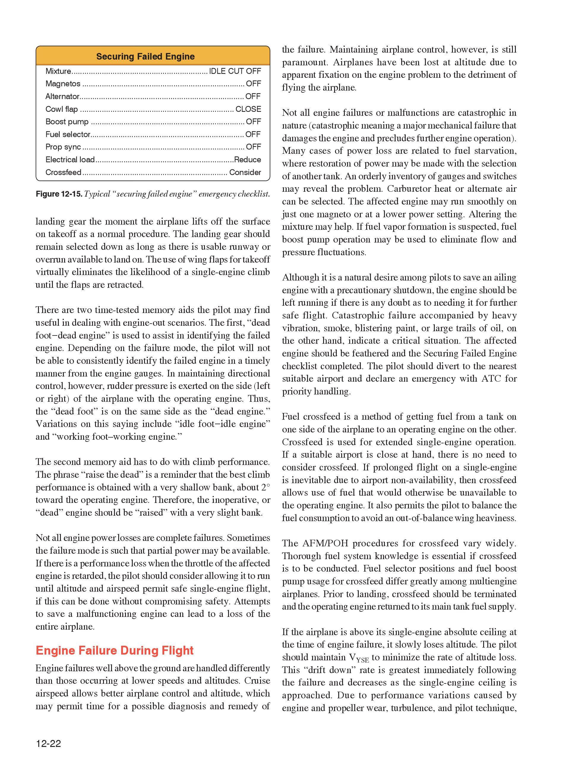If the airplane is above its single-engine absolute ceiling at the time of engine failure, it slowly loses altitude. The pilot should maintain VYSE to minimize the rate of altitude loss. This drift-down rate is greatest immediately following the failure and decreases as the single-engine ceiling is approached. Due to performance variations caused by engine and propeller wear, turbulence, and pilot technique, the airplane may not maintain altitude even at its published single-engine ceiling. Any further rate of sink, however, would likely be modest.

An engine failure in a descent or other low-power setting can be deceiving. The dramatic yaw and performance loss is absent. At very low power settings, the pilot may not even be aware of a failure. If a failure is suspected, the pilot should advance both engine mixtures, propellers, and throttles significantly, to the takeoff settings if necessary, to correctly identify the failed engine. The power on the operative engine can always be reduced later.

Engine inoperative approach and landing. The approach and landing with one engine inoperative is essentially the same as a two-engine approach and landing. The traffic pattern should be flown at similar altitudes, airspeeds, and key positions as a two-engine approach. The differences are the reduced power available and the fact that the remaining thrust is asymmetrical. A higher than normal power setting is necessary on the operative engine.

With adequate airspeed and performance, the landing gear can still be extended on the downwind leg, in which case it should be confirmed down no later than abeam the intended point of landing. Performance permitting, initial extension of wing flaps, typically 10 degrees, and a descent from pattern altitude can also be initiated on the downwind leg. The airspeed should be no slower than VYSE. The direction of the traffic pattern, and therefore the turns, is of no consequence as far as airplane controllability and performance are concerned. It is perfectly acceptable to make turns toward the failed engine.

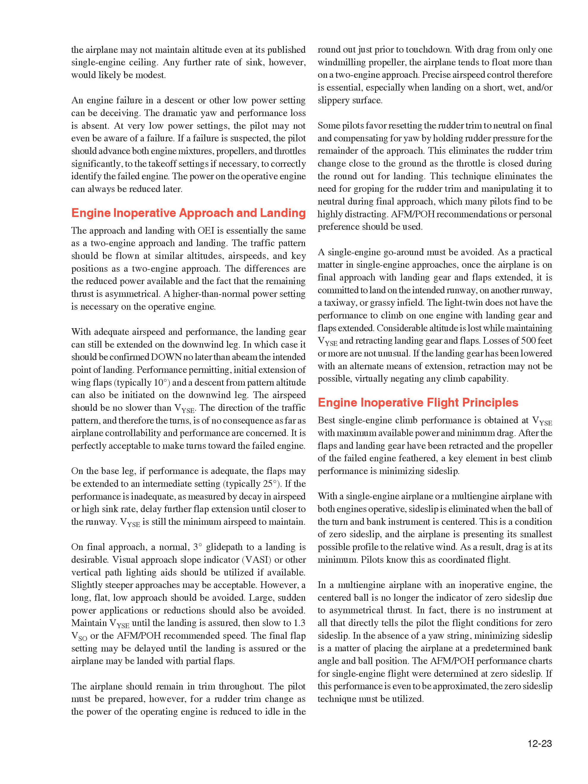In a multi-engine airplane with an inoperative engine, the centered ball is no longer the indicator of zero sideslip due to asymmetrical thrust. In fact, there is no instrument at all that directly tells the pilot the flight conditions for zero sideslip. In the absence of a yaw string, minimizing sideslip is a matter of placing the airplane at a predetermined bank angle and ball position. The AFM/POH performance charts for single-engine flight were determined at zero sideslip. If this performance is even to be approximated, the zero sideslip technique must be utilized.

There are two different control inputs that can be used to counteract the asymmetrical thrust of a failed engine. 1. Yaw from the rudder. 2. The horizontal component of lift that results from bank with the ailerons. Used individually, neither is correct. Used together in the proper combination, zero sideslip and best climb performance are achieved. Three different scenarios of airplane control inputs are presented below. Neither of the first two is correct. They are presented to illustrate the reasons for the zero sideslip approach to best climb performance.

1. Engine inoperative flight with wings level and ball centered requires large rudder input towards the operative engine. Figure 12-16. The result is a moderate sideslip towards the inoperative engine. Climb performance is reduced by the moderate sideslip. With wings level, VMC is significantly higher than published, as there is no horizontal component of lift available to help the rudder combat asymmetrical thrust.

2. Engine inoperative flight using ailerons alone requires an 8 to 10 degree bank angle towards the operative engine. Figure 12-17. This assumes no rudder input. The ball is displaced well towards the operative engine. The result is a large sideslip towards the operative engine. Climb performance is greatly reduced by the large sideslip.

3. Rudder and ailerons used together in the proper combination result in a bank of approximately 2 degrees towards the operative engine. The ball is displaced approximately 1/3 to 1/2 towards the operative engine. The result is zero sideslip and maximum climb performance. Figure 12-18. Any attitude other than zero sideslip increases drag, decreasing performance.

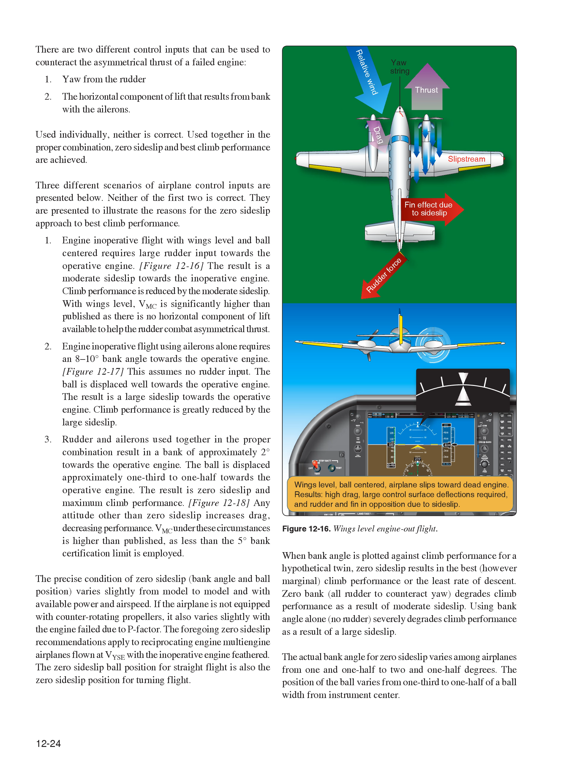When bank angle is plotted against climb performance for a hypothetical twin, zero sideslip results in the best, however marginal, climb performance or the least rate of descent. Zero bank, all rudder to counteract yaw, degrades climb performance as a result of moderate sideslip. Using bank angle alone, no rudder, severely degrades climb performance as a result of a large sideslip. The actual bank angle for zero sideslip varies among airplanes from 1 1/2 to 2 1/2 degrees. The position of the ball varies from 1/3 to 1/2 of a ball width from instrument center.

For any multi-engine airplane, zero sideslip can be confirmed through the use of a yaw string. A yaw string is a piece of string or yarn approximately 18 to 36 inches in length taped to the base of the windshield or to the nose near the windshield along the airplane centerline. In two-engine coordinated flight, the relative wind causes the string to align itself with the longitudinal axis of the airplane, and it positions itself straight up the center of the windshield. This is zero sideslip. Experimentation with slips and skids vividly displays the location of the relative wind.

Adequate altitude and flying speed must be maintained while accomplishing these maneuvers. With an engine set to zero thrust, or feathered, and the airplane slowed to VYSE, a climb with maximum power on the remaining engine reveals the precise bank angle and ball deflection required for zero sideslip and best climb performance. Zero sideslip is again indicated by the yaw string when it aligns itself vertically on the windshield. There are very minor changes from this attitude depending upon the engine failed, with non-counter-rotating propellers, power available, airspeed and weight, but without more sensitive testing equipment, these changes are difficult to detect.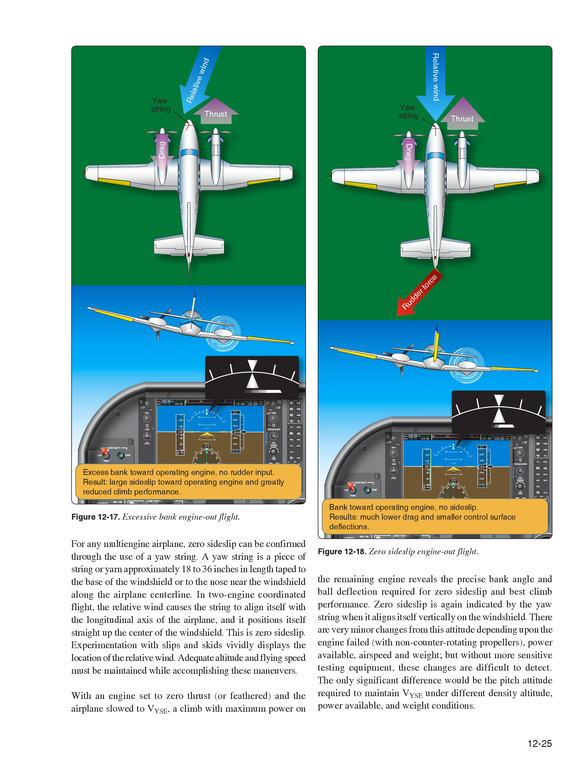The only significant difference would be the pitch attitude required to maintain VYSE under different density altitude, power available, and weight conditions. If a yaw string is attached to the airplane at the time of a VMC demonstration, it is noted that VMC occurs under conditions of sideslip. VMC was not determined under conditions of zero sideslip during aircraft certification, and zero sideslip is not part of a VMC demonstration for pilot certification.

To review, there are two different sets of bank angles used in OEI flight. 1. To maintain directional control of a multi-engine airplane suffering an engine failure at low speeds, such as climb, momentarily bank at least 5 degrees and a maximum of 10 degrees towards the operative engine as the pitch attitude for VYSE is set. This maneuver should be instinctive to the proficient multi-engine pilot and take only 1 to 2 seconds to attain. It is held just long enough to assure directional control as the pitch attitude for VYSE is assumed.

2. To obtain the best climb performance, the airplane must be flown at VYSE and zero sideslip with a failed engine feathered and maximum available power from the operating engine. Zero sideslip is approximately 2 degrees of bank toward the operating engine, and a 1/3 to 1/2 ball deflection also toward the operating engine. The precise bank angle and ball position varies somewhat with make and model and power available. If above the airplane's single-engine ceiling, this attitude and configuration results in the minimum rate of sink.

In OEI flight at low altitudes and airspeeds such as the initial climb after takeoff, pilots must operate the airplane so as to guard against the 3 major accident factors: 1. Loss of directional control, 2. Loss of performance, and 3. Loss of flying speed. All have equal potential to be lethal. Loss of flying speed is not a factor, however, when the airplane is operated with due regard for directional control and performance.

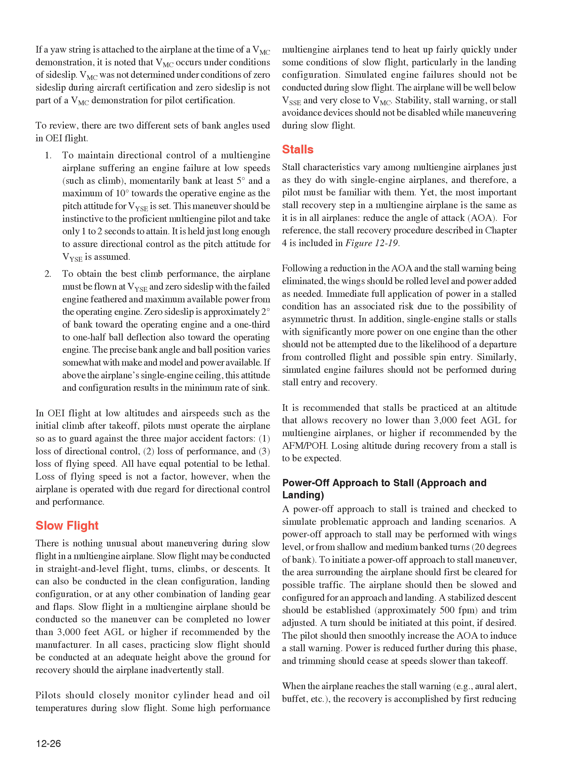The pilot should then smoothly increase the AOA to induce a stall warning. Power is reduced further during this phase, and trimming should cease at speeds slower than takeoff. When the airplane reaches the stall warning, for example, aural alert, buffet, etc., the recovery is accomplished by first reducing the AOA until the stall warning is eliminated. The pilot then rolls the wings level with coordinated use of the rudder and smoothly applies power as required.

The airplane should be accelerated to Vx, if simulated obstacles are present, or Vy during recovery and climb. Considerable forward elevator/stabilator pressure will be required after the stall recovery as the airplane accelerates to Vx or Vy. Appropriate trim input should be anticipated. The flap setting should be reduced from full to approach, or as recommended by the manufacturer. Then, with a positive rate of climb, the landing gear is selected up. The remaining flaps are then retracted as a positive rate of climb continues.

Power on approach to stall, takeoff and departure. A power on approach to stall is trained and checked to simulate problematic takeoff scenarios. A power on approach to stall may be performed from straight and level flight or from shallow and medium bank turns, 20 degrees of bank. To initiate a power on approach to stall maneuver, the area surrounding the airplane should always be cleared to look for potential traffic. The airplane is slowed to the manufacturer's recommended liftoff speed.

The airplane should be configured in the takeoff configuration. Trim should be adjusted for this speed. Engine power is then increased to that recommended in the AFM/POH for the practice of power on approach to stall. In the absence of a recommended setting, use approximately 65% of maximum available power. Begin a turn, if desired, while increasing AOA to induce a stall warning, for example, aural alert, buffet, etc. Other specified, reduced, power settings may be used to simulate performance at higher gross weights and density altitudes.

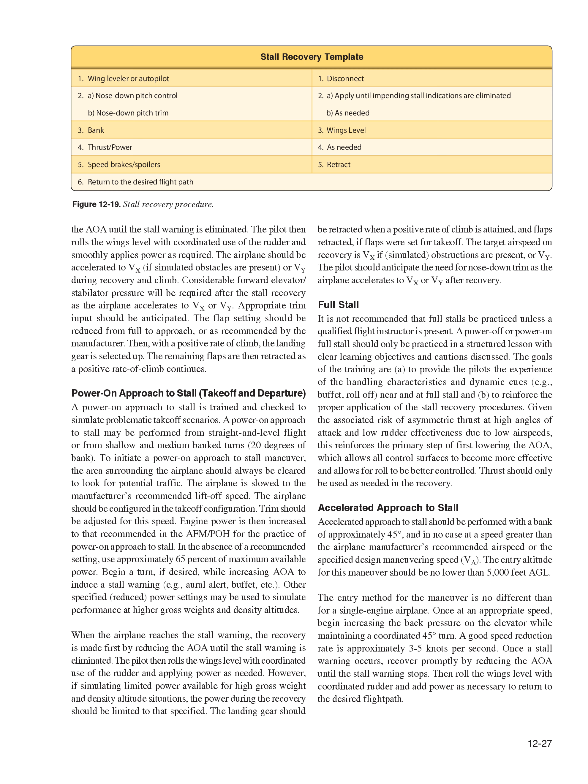Once at an appropriate speed, begin increasing the back pressure on the elevator while maintaining a coordinated 45 degree turn. A good speed reduction rate is approximately 3 to 5 knots per second. Once a stall warning occurs, recover promptly by reducing the AOA until the stall warning stops. Then roll the wings level with coordinated rudder and add power as necessary to return to the desired flight path.

Spin awareness. No multi-engine airplane is approved for spins, and their spin recovery characteristics are generally very poor. It is therefore necessary to practice spin avoidance and maintain a high awareness of situations that can result in an inadvertent spin. In order to spin any airplane, it must first be stalled. At the stall, a yawing moment must be introduced. In a multi-engine airplane, the yawing moment may be generated by rudder input or asymmetrical thrust. It follows, then, that spin awareness be at its greatest during VMC demonstrations, stall practice, slow flight, or any condition of high asymmetrical thrust, particularly at low speed/high AOA.

Single-engine stalls are not part of any multi-engine training curriculum. No engine failure should ever be introduced below safe, intentional one-engine inoperative speed, VSSE. If no VSSE is published, use VYSE. Other than training situations, the multi-engine airplane is only operated below VSSE for mere seconds just after liftoff, or during the last few dozen feet of altitude in preparation for landing.

For spin avoidance when practicing engine failures, the flight instructor should pay strict attention to the maintenance of proper airspeed and bank angle as the student executes the appropriate procedure. The instructor should also be particularly alert during stall and slow flight practice. Forward center of gravity positions result in favorable stall and spin avoidance characteristics, but do not eliminate the hazard.

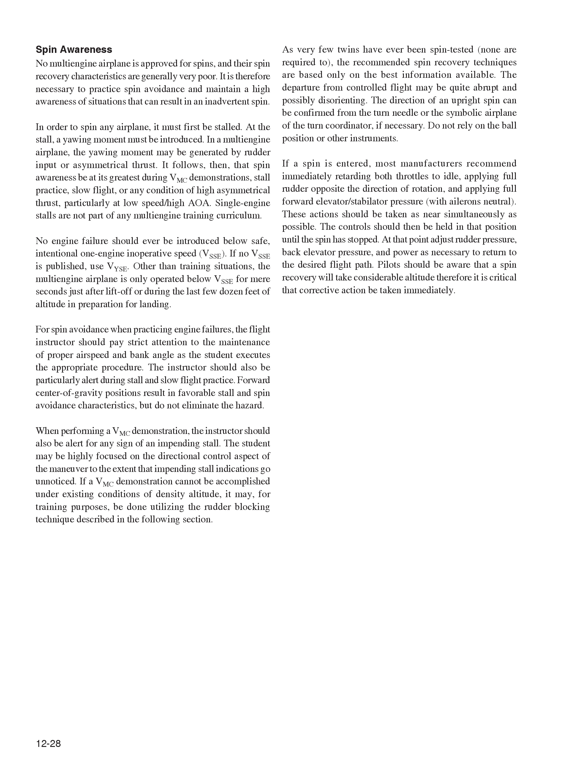If a spin is entered, most manufacturers recommend immediately retarding both throttles to idle, applying full rudder opposite the direction of rotation, and applying full forward elevator/stabilator pressure, with ailerons neutral. These actions should be taken as near simultaneously as possible. The controls should then be held in that position until the spin is stopped. At that point, adjust rudder pressure, back elevator pressure, and power as necessary to return to the desired flight path. Pilots should be aware that a spin recovery will take considerable altitude, therefore it is critical that corrective action be taken immediately.